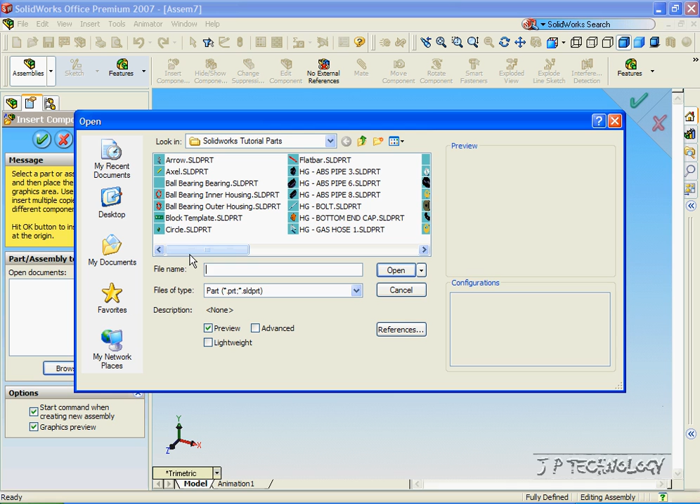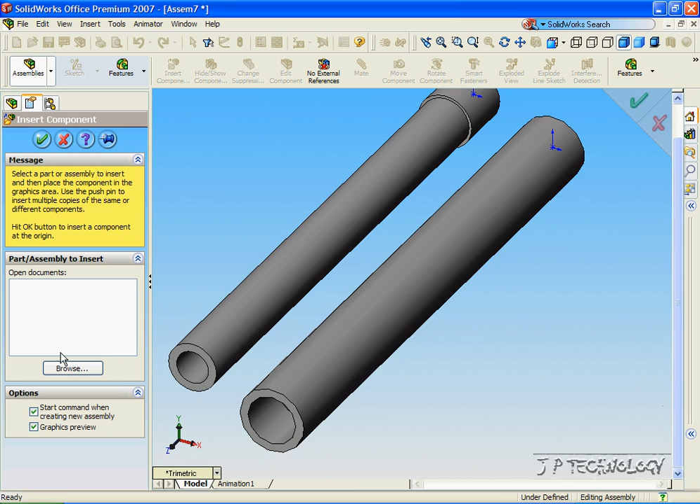All the parts that we need are found on the DVD, and the parts are Telescopic 30, 45, and 60. Now with Telescopic 60, let's open it up and put it to the origin. Now let's get number 45 and put it beside 60, and we'll get 30 and put it beside 45.

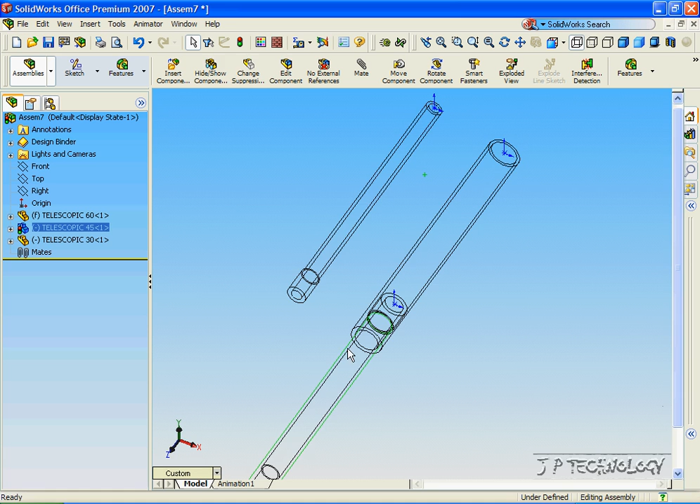Now let's zoom out a bit and click wireframe. From the wireframe you can see that inside of Telescopic 60 there's an inner radius that's smaller than the rest. What that's going to do is as 45 moves through it, it's free to move until the two radiuses are the same and then it stops. And that's the same with number 30 when we flip the direction of it.

So now let's go back to shaded with edges and we'll begin mating these. To start off, let's click mate, click this tube, and we'll make them concentric and click OK.

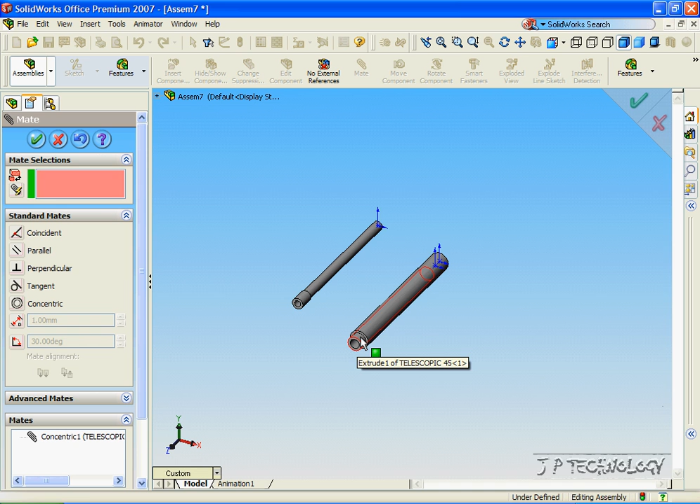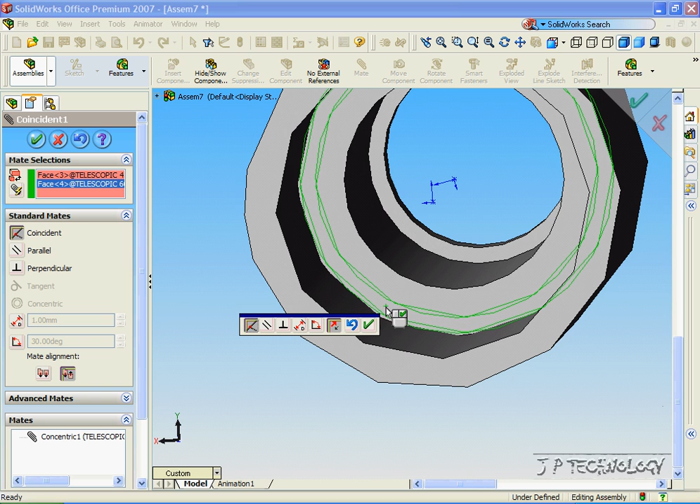Now let's pull this tube all the way out and click the front view. Now let's click this face. As you can see, it's the face that sticks out. And as we go around, we're going to click this inside face of number 60 and we're going to go into advanced mates and we're going to have to do distances.

Now let's click isometric, click the wireframe so you can see inside what's going on. So what we're going to do is we're going to make a minimum value of 0 millimeters and then we're going to make a maximum value until the part is completely in. So let's increase this and see where it's going.

And it's going in the wrong direction right now, so we need to flip the direction. So now it's going in. So let's see how far we can make it go all the way in. Let's make it 1000, and that's too far. So let's change this to 800.

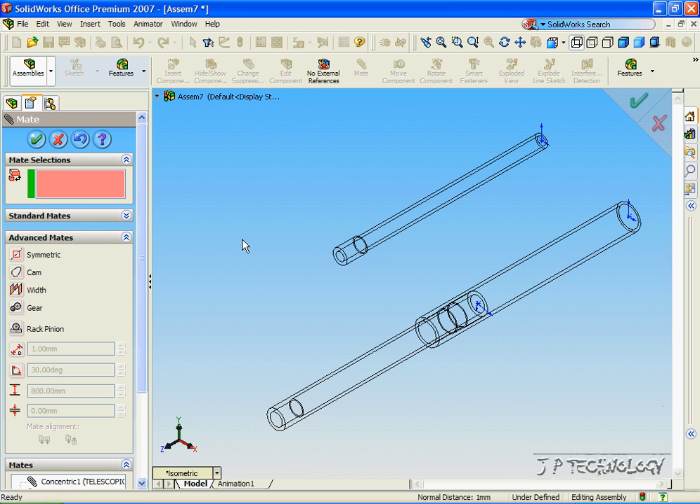And that looks good, so let's make the max 800. Click accept, click OK, click shaded with edges, and now we've made the first telescopic bit of our assembly.

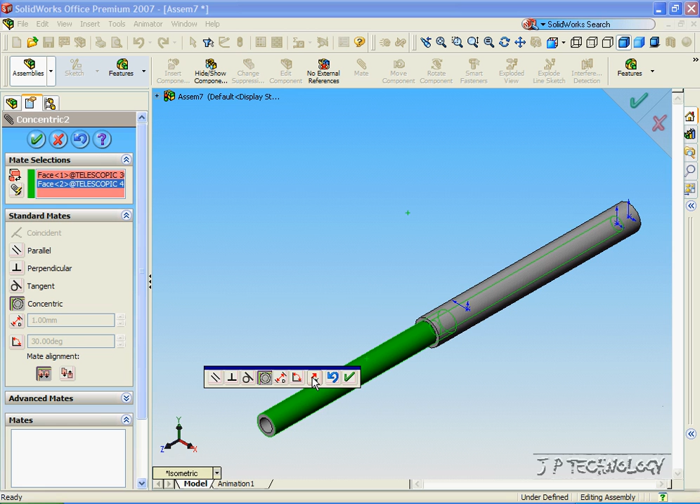Now let's work on the second one. Let's click mate, click this tube, and it's the wrong alignment, so let's flip it, click OK.

Now let's pull the little one out all the way, click the front view, and we're going to click this face, and that's the face that's protruding out. And we'll go to the back view and we're going to click on this face here.

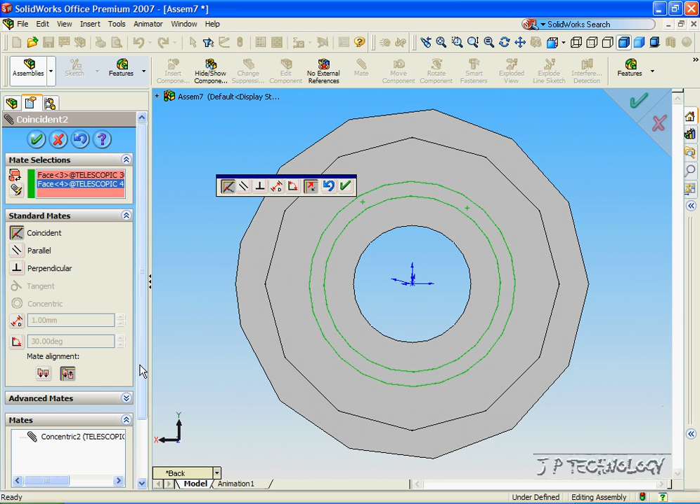And we're going to go into advanced mates and we're going to do a distance again. So let's click isometric and let's view it in wireframe. And we're going to make a minimum of 0 and a maximum of 800.

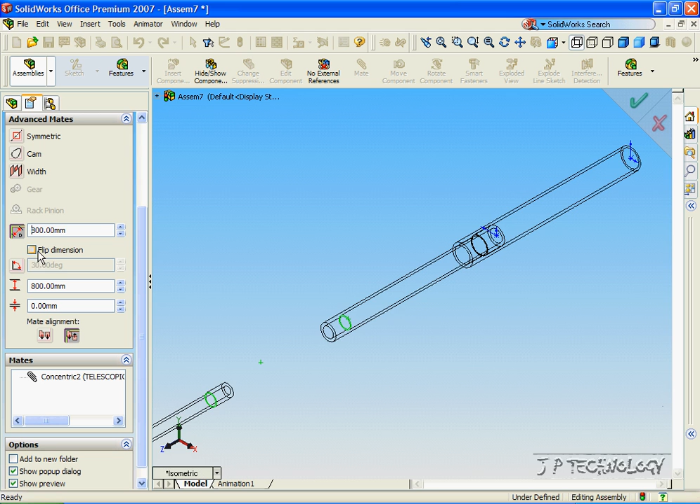Now let's see it at 800. Now it's the wrong direction, so we have to flip the direction again. Looks good. Click OK, click OK, and let's go back to shaded with edges.

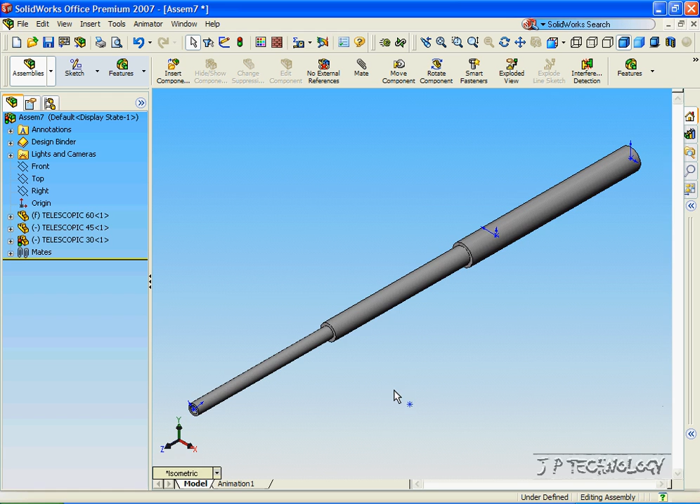And we can pull it out and push it all back in. So let's click isometric again. And we've created our telescopic part.

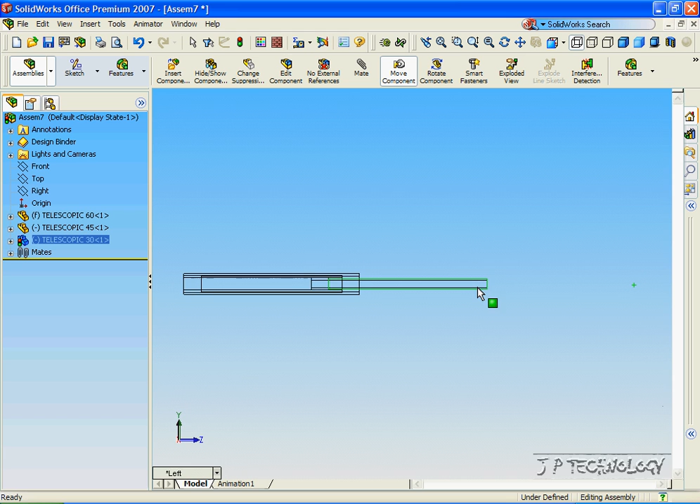Now let's click View, let's hide the origins, and let's look at it in wireframe. Let's look at it from the left so we can see exactly what's going on. Now you can see as we pull it through, it grabs one, and then it grabs the other. And that's exactly what we want it to do.

Now let's click Shade with Edges again, click Isometric, and that completes our tutorial on how to create a telescopic part with assembly.